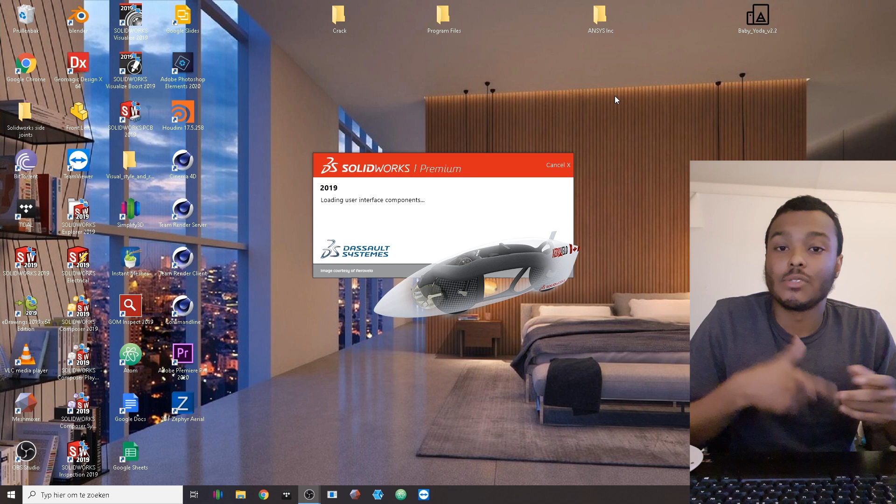Right now my SolidWorks is loading up, but I can talk you guys through a couple of renders I already made of the lower wishbone. In these renders you'll see the wishbone coming through the wheel, so you can see the whole wishbone assembly from outside the car, which is usually obstructed by a brake disc and caliper or rim spokes. Right now the design is open so you can see everything from all angles, and you'll even see it when the car body panels are attached. That's something I'm very much looking forward to.

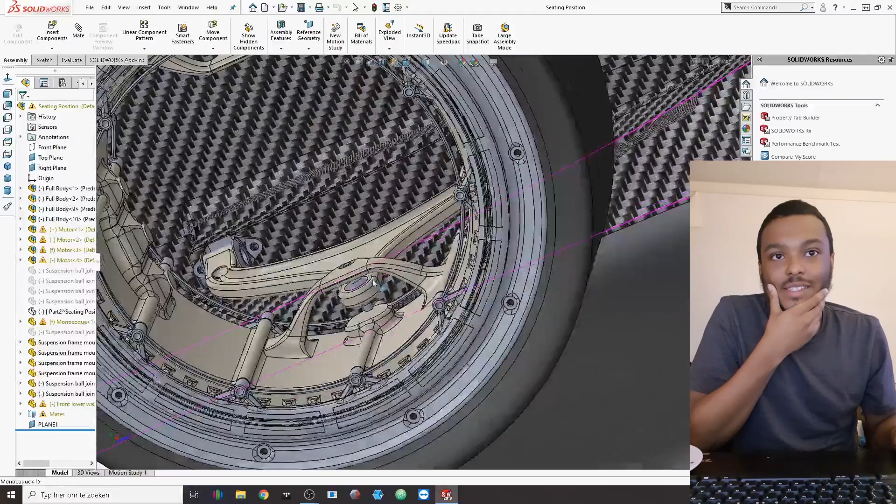Hopefully by this time my SolidWorks has loaded up, and a couple of you guys have subscribed, and I'll be able to take you through the process of making another wishbone. It's taking a while. Right now you can see I made a carbon fiber monocoque for the car, but I haven't put that in video form yet since I didn't have time. I'll make another video explaining how I did it and the thinking behind it, so don't worry about it. For now I'll show you the lower wishbone and how I made and designed it, and the principle behind it, then continue on to the top half.

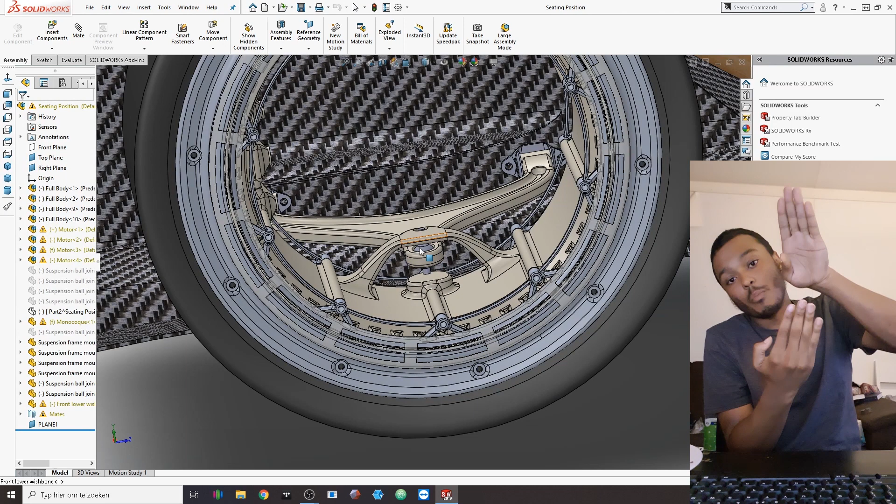For the lower wishbone, I made an encasing, like a bridge setup, to house the ball joint that will be attached to the wishbone. With this ball joint you have the ability not only to have suspension going up or down, but also let the wheel rotate, which you need for steering. If it were a regular joint, it would only go up and down with no steering capability. That's why we use ball joints here.

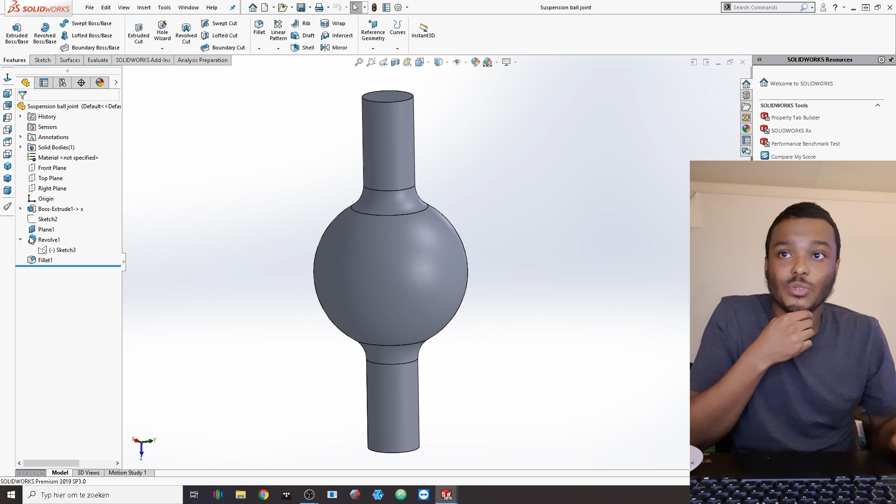If I go to this part separately, you can see how it's made - it's very simple, basically just this feature tree, and I could have made it in just 2 steps or even one, because I made a fillet that could have been done in the sketch. What I did is make one rod, then attached a sketch to the center of it with a circle. Then I made a revolve around the center line of the rod, which is how I got the shape. Then I added a fillet, but I could have done that in the revolve if I made the sketch with that profile. There are multiple ways of doing things - no necessarily right or wrong way - but that's basically how you end up with a ball joint.

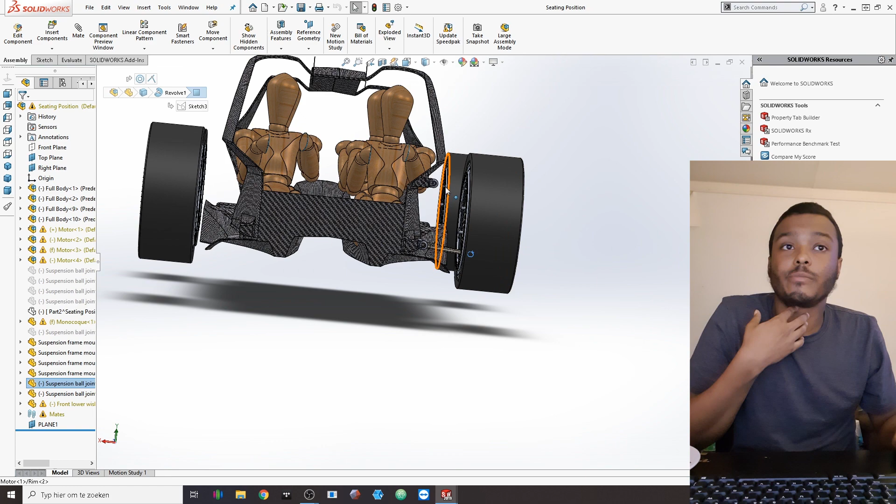What I also always do with suspension is, because the geometry won't be perfect, make sure it's level right here. If you want to attach the wheels in a certain way to the body, sometimes you have to maneuver them a little to get the angle right, while still maintaining the full range so you can do everything with it.

That is kind of why it is a little bit difficult to do these, because the angles might get messed up, and that's why I'm also going to show you how to get through that.

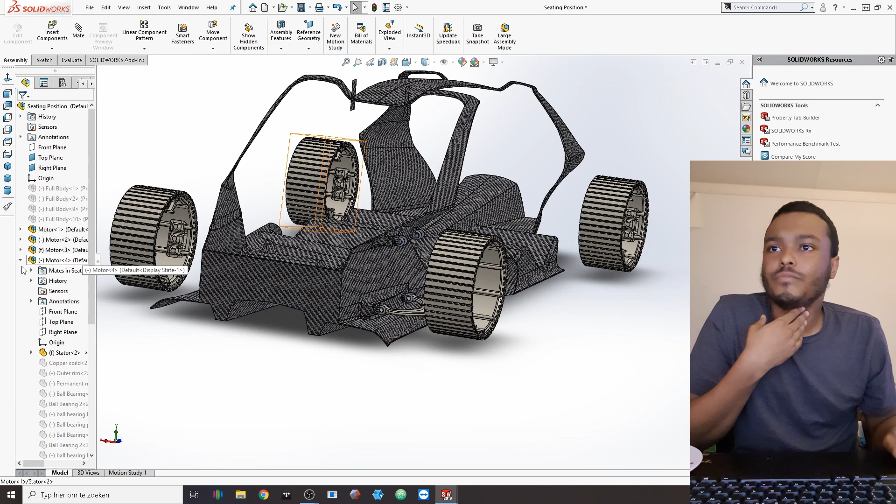Here you can already see I have a top ball joint in place. To make it a little easier on myself, I'm going to take out everything I don't need to get the file size down in this model, because the only thing I need is the rim you can see here. I'm also going to take the dummies out so you get all the RAM capable of doing it, because my computer isn't that fast these days. Let me also take out the other motors I don't really need.

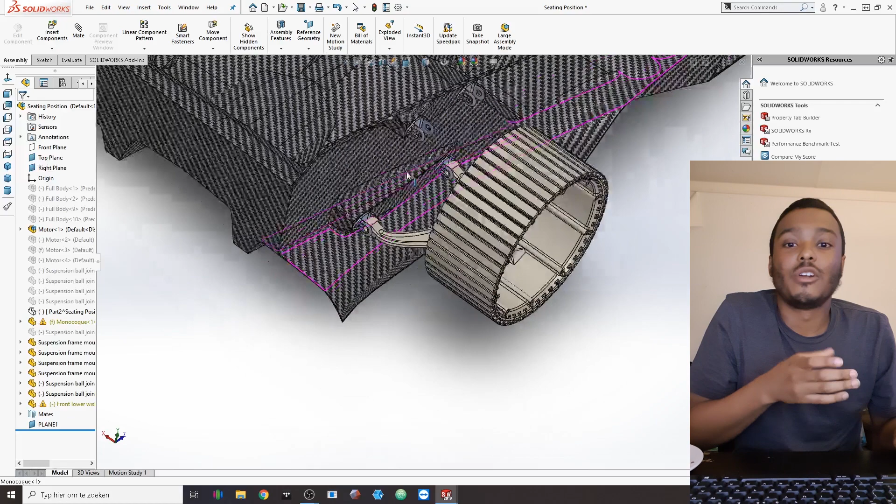So here we have the smallest file size, and it's also beneficial for you to do that if you're working on a smaller section of the car and don't need all the files in there—kick them out, because the more RAM you're using in SolidWorks, the easier it will crash too. That's also a tip that I have.

To begin with how to actually make it, I'm going to go back to the revolve, and once I have these in place, I'm going to show the sketch, because then I also have the center point of where the actual ball joint is sitting, and that's a very important point to have. You'll also have to do that here to get the center point of where the axis of rotation will be for that actual mounting point.

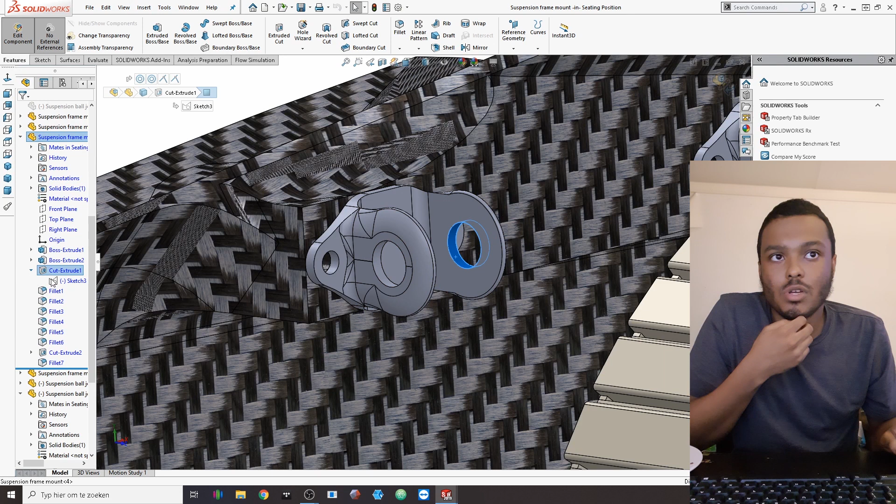So again, let's find out which sketch that is, and then I can showcase that one. And then we will also have a center of rotation for that point right there.

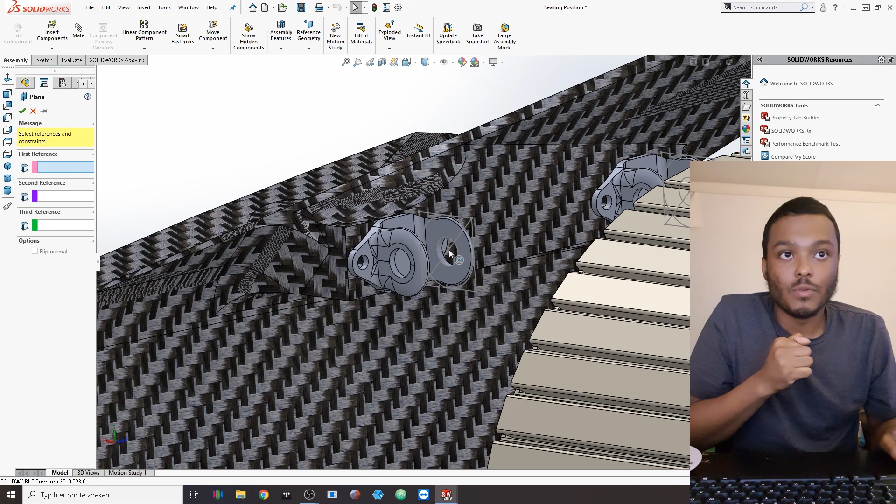The next step I always do is exit that component, and then within the actual model I make a new plane. So that is here, in assembly, reference geometry, plane, and then I select the actual center point right here of the axis of rotation for the suspension arm, and then do the same for that sketch right there.

So then you have the two planes selected, but you still need a ground plane, and you can select the front plane in my case, which is the same as this plane, so that doesn't really matter. Actually it's better to use the front plane instead of this sketch, because then it's not related to as many components—otherwise it's going to depend on that geometry existing for that plane to exist. That's a little messed up, but it's already the case with these two components, so we're just going to keep that to a minimum for now.

So that is the front plane, and then you have the same effect.

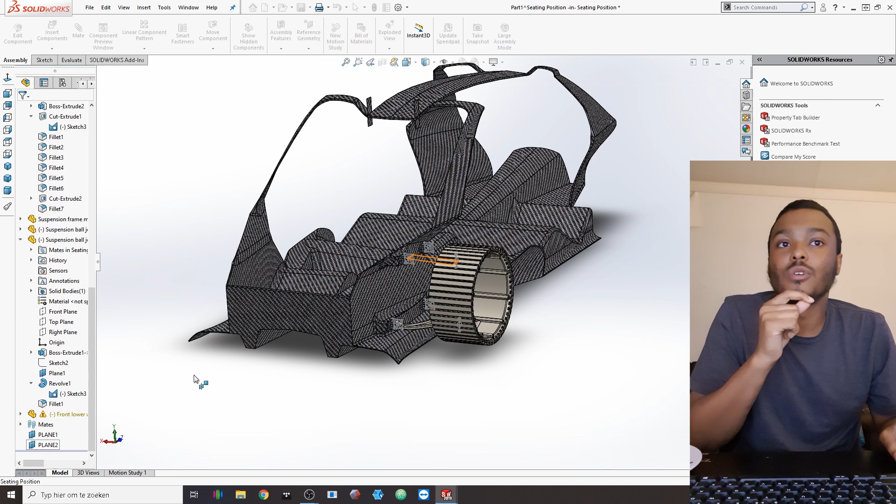Now that we have that plane, we can go to insert components, select the new part, and we'll base that new part on that plane, because then that will be the straight origin and everything for it. You can see on your cursor there's a green check, meaning select the surface you want your new part to be based on, and then you click on the plane. So it will use that plane as the first reference to lay the ground layer for.

And once that's done, now comes the part where we start to actually model the wishbone. So that isn't too difficult.

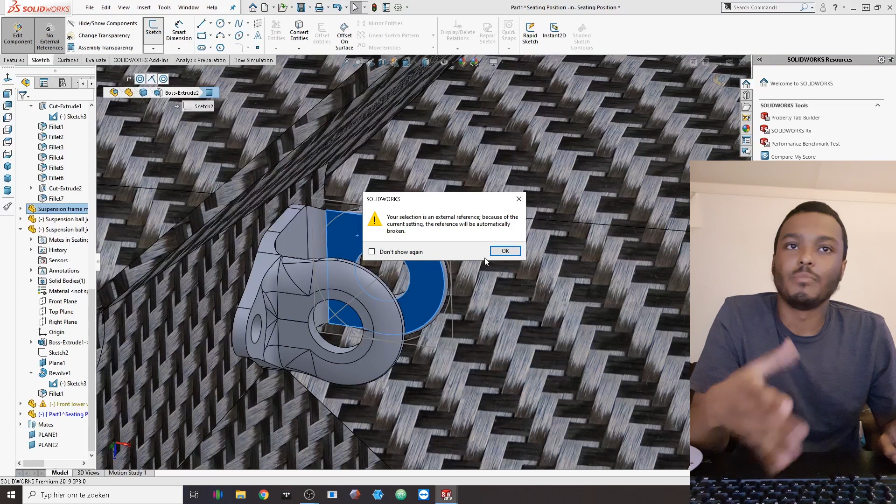I always exit the sketch again, select this plane, and because it's an external part that's already part of something else, you'll get a lot of errors and stuff like that, but you can ignore all of those.

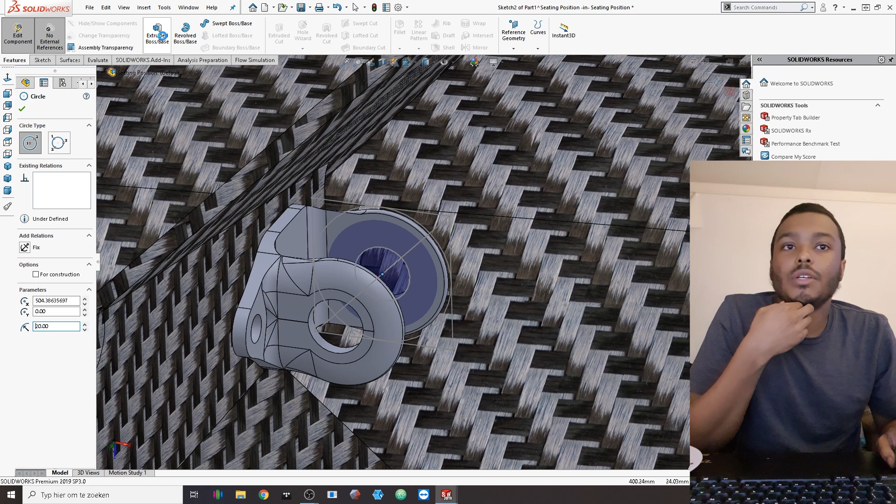Select the inner circle, click on convert entities—I think I used a 20 millimeter outline or outer radius for that circle—and then again I think it was 40 millimeters. Then you have the first circle to have an attachment point for your actual wishbone.

Do the same thing on the other end where the suspension frame mount is. I didn't show you how to make these, but it's very rudimentary and simple. You don't even have to make it as a separate component if you have a chassis that already has a hole in it.

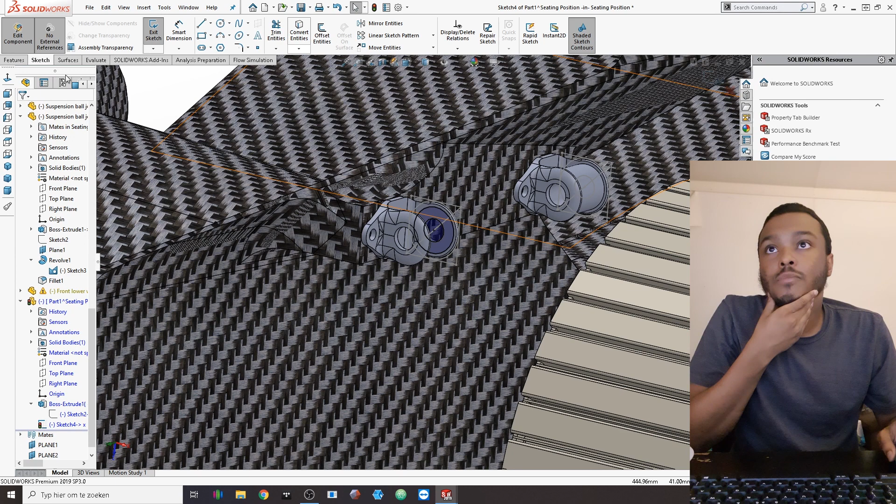Once you've selected this second face, go back to that new part we just made, and copy the sketch used on the previous lobe. Click on that sketch and click convert entities, and it will appear right there, same thing all over again. Then do a boss extrude for 40 millimeters.

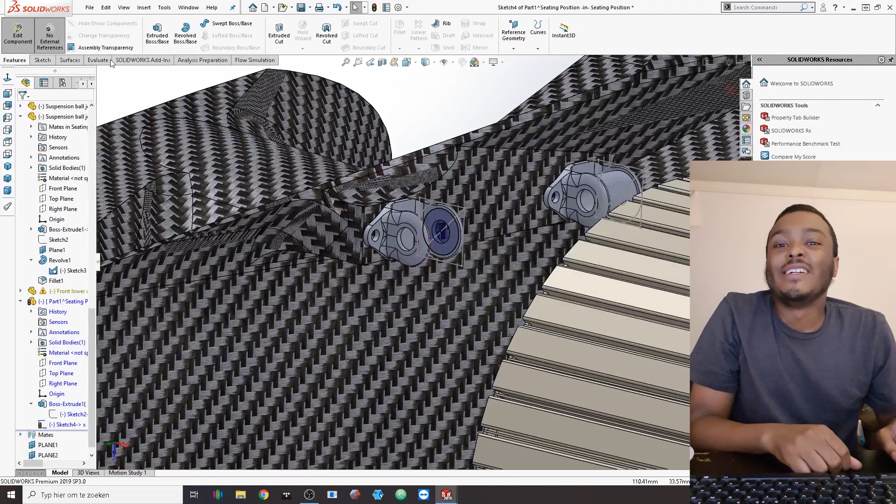I'm kind of talking through it because my SolidWorks is constantly lagging. I really need to upgrade my computer, this is getting very annoying, every single time it lags once I push a button. I'm going through great lengths to make this video, because if I'm not screen recording it's not this bad.

But at least now we have the second lobe, and we need to make one third one, for the ball joint. Once we've done that, it's easy sailing, because you can exit this assembly, and it's a little easier to modify things from outside it.

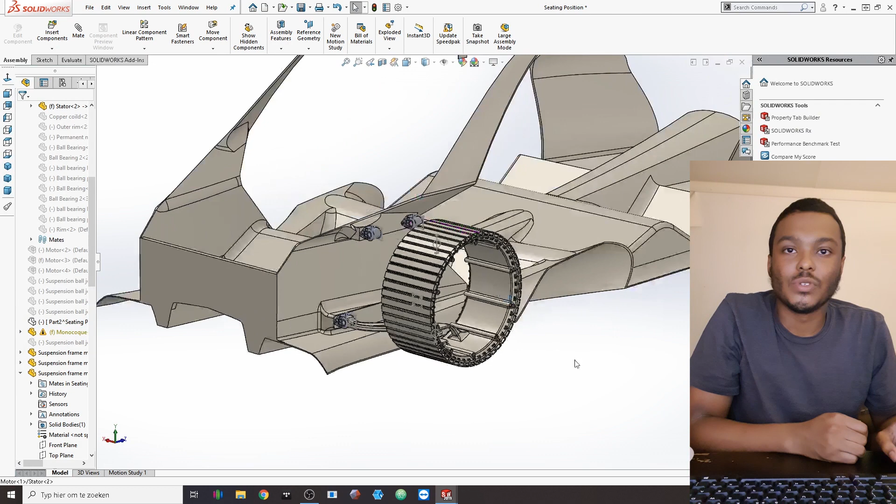Also, I'm going to modify the carbon fiber to be a regular texture, because seeing that graphic pattern constantly will probably slow the computer up a little. So I'll keep it like this for modeling purposes instead of showing the graphics with the carbon fiber. That's a tip to keep it smooth and keep your file sizes down.

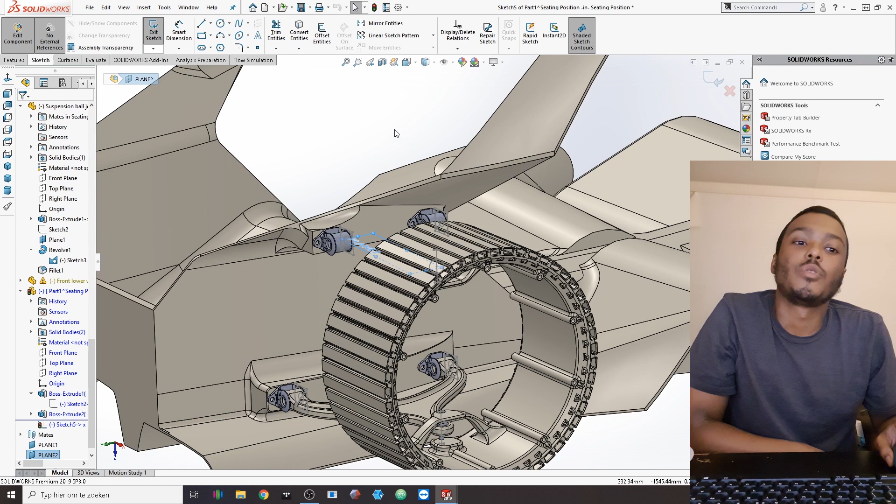I'll select that plane 2 that I made, and before that I need to be in the new part. So select plane 2, click on sketch, and go to the ball joint if my computer allows me, and I'll find that line sitting exactly on that sketch plane.

Click convert entities and select offset entities, 10 millimeters. The inner one was 15 millimeter radius, right? Yes, so I'll extrude it for 30, and instead of blind, select the mid plane, so it uses that as the middle reference point and goes in both directions. Now we have the point where the ball joint will sit, and where it's mounted to the actual monocoque of the car.

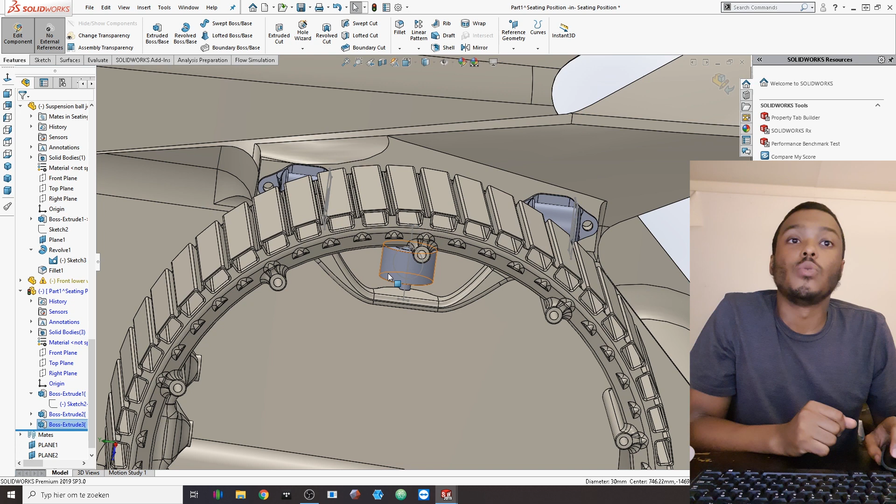So what I can do now is go to the part itself, and I'm going to save it real quick.

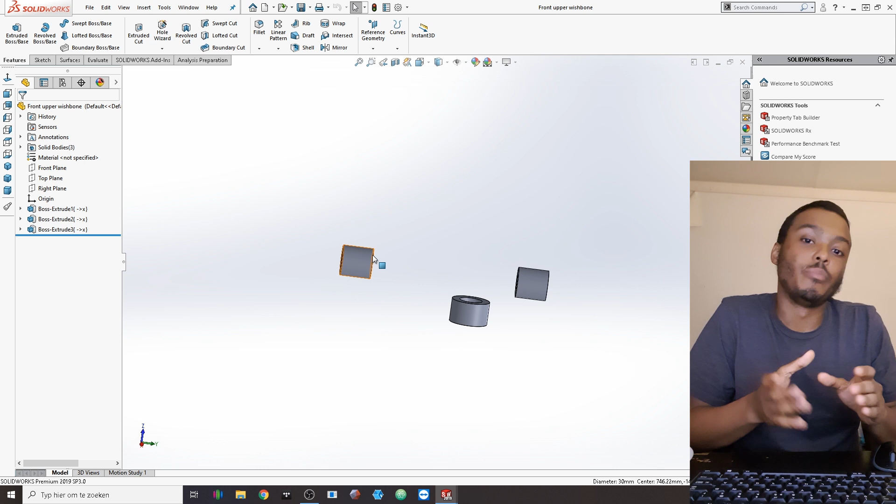Now that we have what I call the front upper wishbone, I'm designing it so it can be flipped to the other side, to not have separate components for front left and front right, just a front component you can multiply. In production it saves time and money, because you can order 10 of something for 5 cars instead of 10 for 10 cars, since you'd need separate sets. If you can use the same component on the left side as the right side, it's always beneficial, so that's why I did that.

I also heard in a previous video that I shouldn't really stomp on the table like that.

But now you can see why I made the decision to make the new part on the plane, because if I go to the front plane, it's actually completely centered, perfectly within these lines and on the basis of everything, not at an angle anywhere. It's just straight all the way, it's perfect.

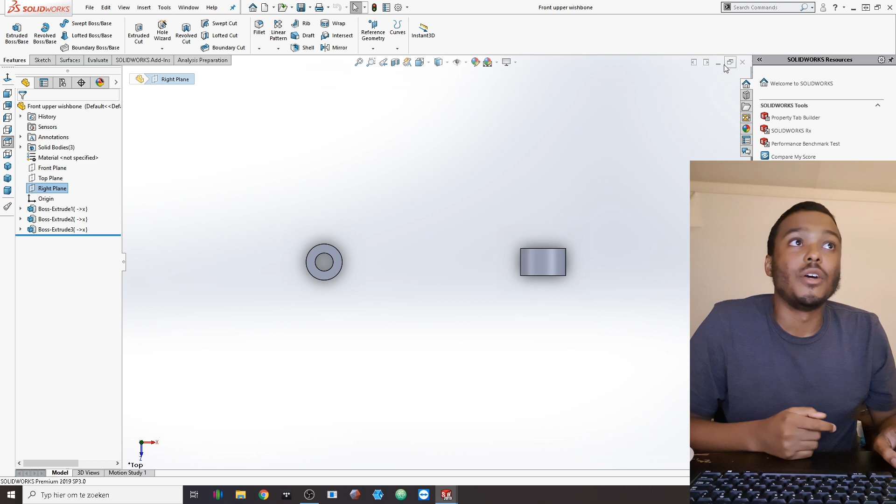Because otherwise, if I wouldn't do that, you would see that it would actually sit at this angle, and that would make it awkward to mirror it along to the next side and everything. So that is kind of why I did that. Hopefully that is understandable.

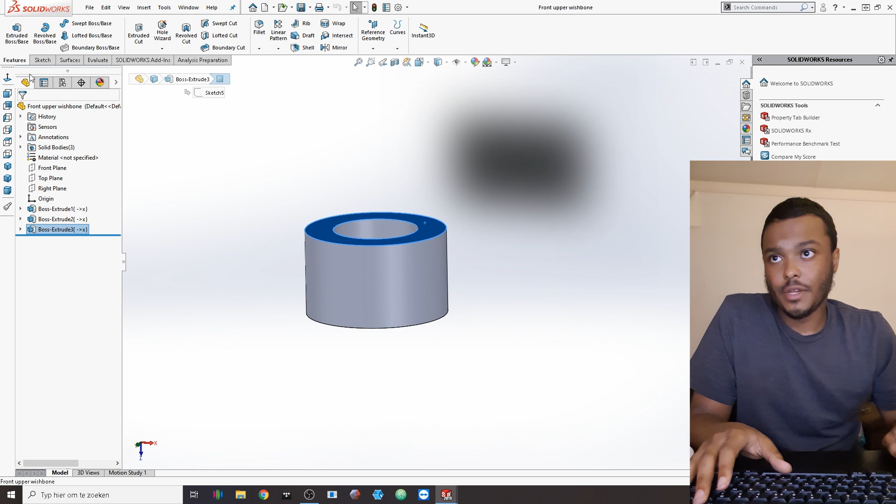Now that we're actually in the front upper wishbone, I'm also going to make a top and bottom section for it. So right here I can select the boss extrude and select convert entities, and add like 10 millimeters. It doesn't really matter because I'm gonna cut it off anyway. So add like 10 millimeters to the top and bottom section for it, and do that on both sides.

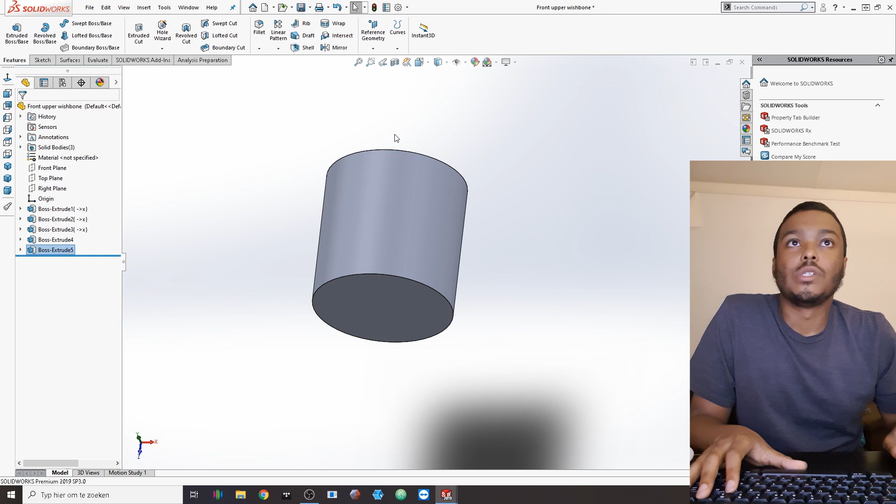And then I'm gonna use the section view, so I'm gonna take it from a side angle, right down the middle of that thing right there. And then I'm gonna select the fillet tool, and because this is now a cylinder that has exactly a 15 millimeter radius and is 30 millimeters high, I can just select 15 and it is a perfect ball right there. So that is already like the attachment for the ball joint and everything.

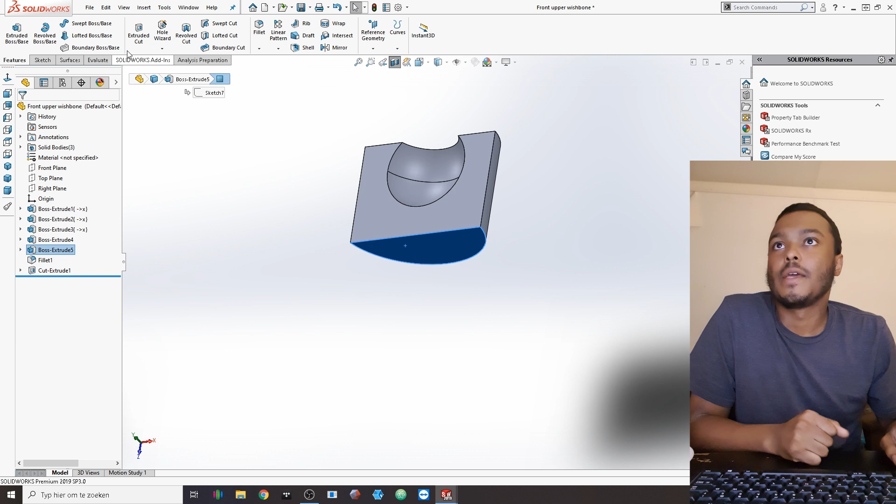So what we're gonna do now is again go to the top surface and do a cut extrude, convert entities, and select 15. And then do the same thing from the bottom, 15.

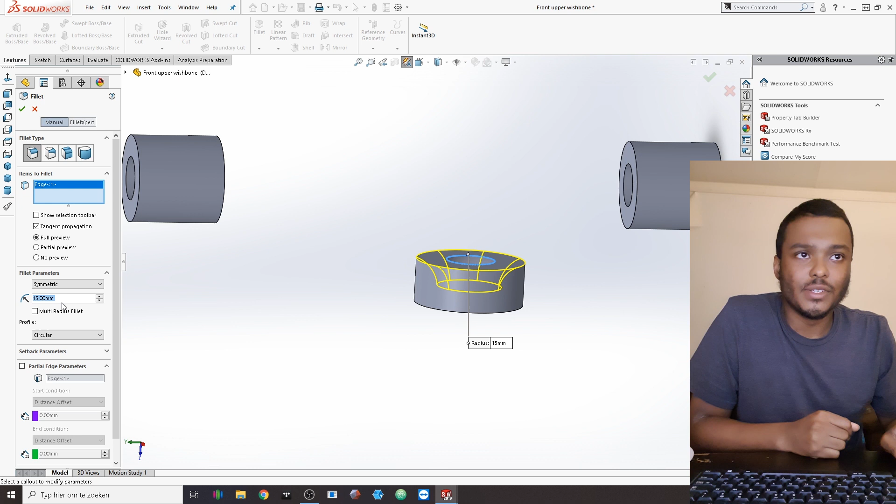And then I'm gonna select again the plane, this plane, because from here on I can then just do the mid plane again. So that's very similar to the initial process. Again, I'm gonna select the straight top view, and then I can draw little squares here.

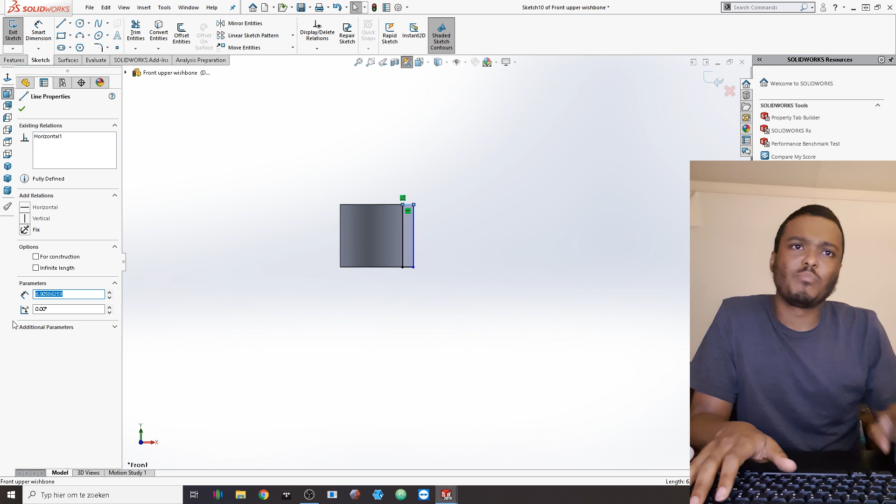That are the exact same width as the ball joints themselves. So I can just select that and drag it out a little bit, but I don't really want the distance to be too big, so let's put it at like 5 millimeters of an edge, and then I'm gonna just copy this section to here.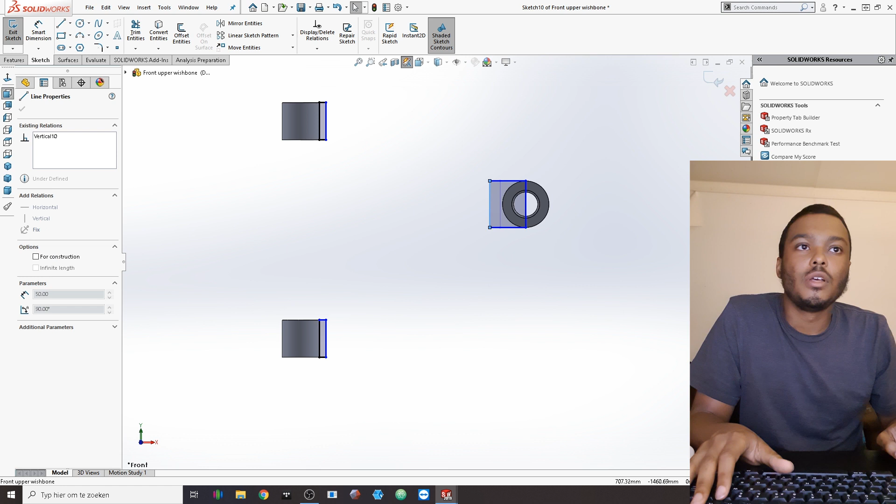And then I'm gonna do the same for the actual ball joint section of the wishbone, so again have it perfectly closed off. This length is supposed to be 50, and if that is 50, then I'm gonna put this at 25 to close that off perfectly.

And then what I'm gonna do is add some splines. So from here to here we'll have one spline, another one from here to here, and then there will be one at the bottom.

So I'm gonna make that, the one at the bottom is interesting because for this upper wishbone, the way that I'm gonna make the suspension is with an electric motor that is attached to this wishbone with a push rod, or a pull rod I should say, the electric motor will then control the ride height of the car, and also its rolling and bump adjustments and all of that. That's a technology that Audi came up with.

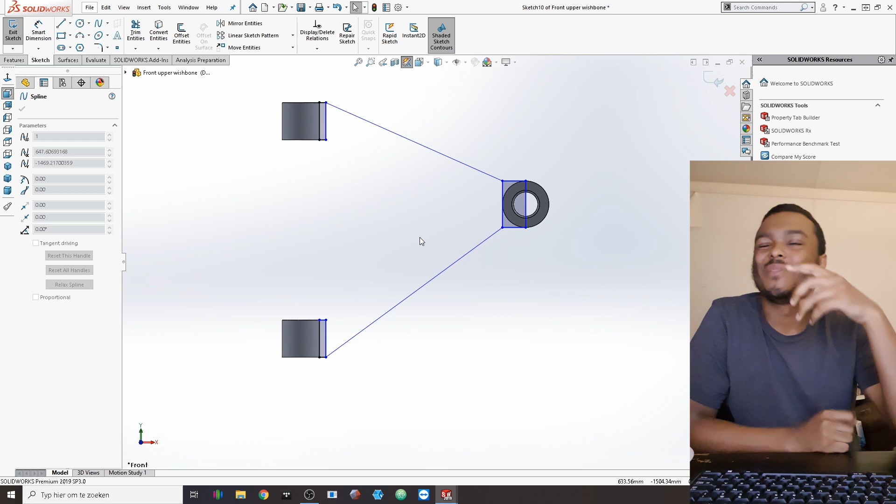So I would need to make a point in this wishbone for that pull rod to be connected to. I need to figure out what and how I'm gonna do that, but it's not too difficult, I can do that once I make the standard shape of the wishbone. But you just need to be a little bit preemptive with your thinking before you make something, because it can save you a lot of time if you have a vision already instead of just going off your gut, which I do too often.

But I'll show you guys what I'm talking about with the motor and everything once this is finalized. So with this point right here, once you selected it, you will get the line properties and everything for the spline right there. But if you then hold down your control button and also select this line, damn.

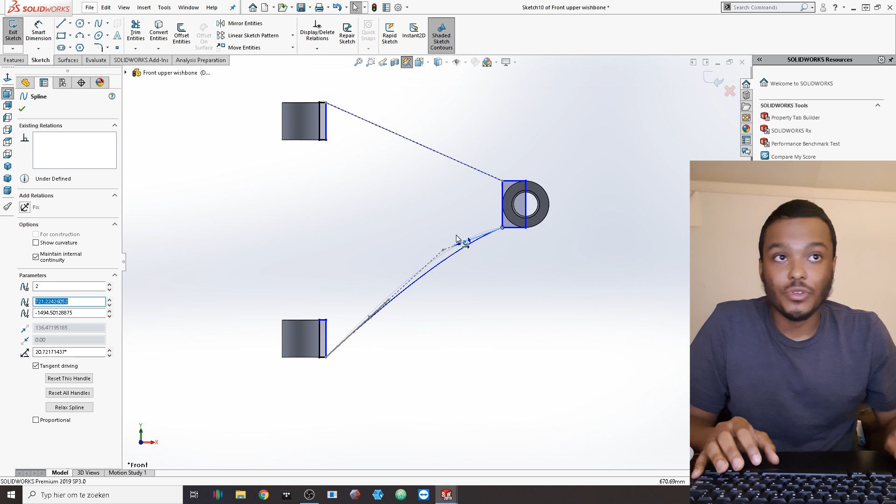With the spline tools, you can click on this point for the control polygon, then hold control and select this line, and select collinear or something like that. It will follow that guideline and make this point match perfectly to that point. Do the same here - select the point, hold control, select that same option, and repeat the process.

This ensures that you have perfect lines that match each other perfectly without any gap between them. Normally you'd be able to do that with a fillet tool, but this saves you that extra step.

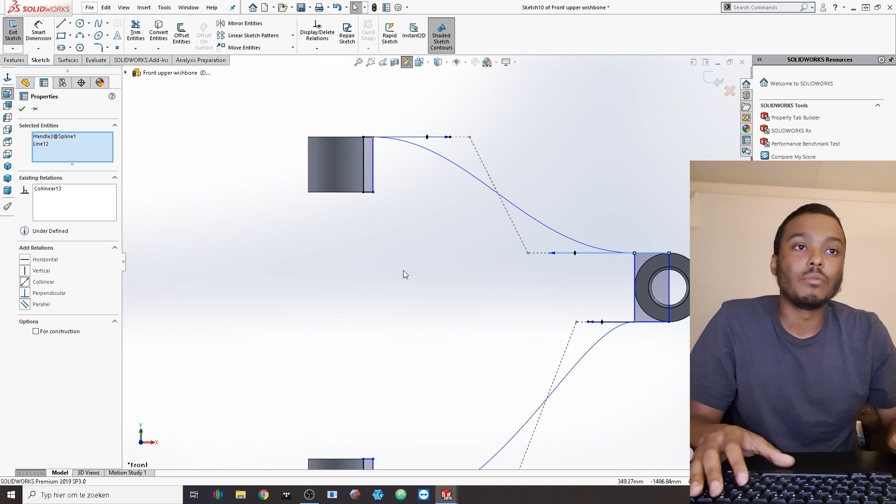If you want to adjust them, you can still pull on them and they will stay in that shape, and then you can adjust it however you want to.

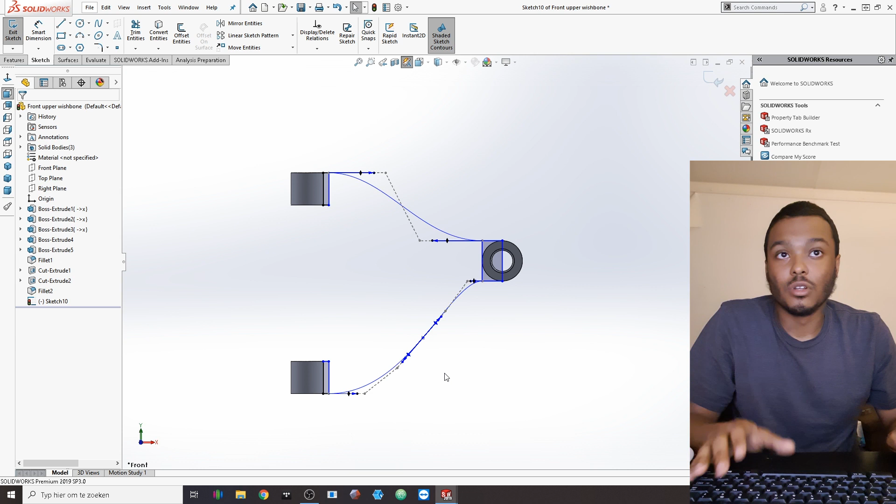What you could also do from this point, if you still don't like it, is right click it and add a tangency control to the middle of the spline, and then you can adjust it even further. It just depends on what you're looking for. For me, this is already fine, but I thought it might be helpful to some of you guys.

So again with this spline - I should describe what I'm doing more. I use the spline tool and dragged one point in the middle, somewhere in the center, and then attach it there.

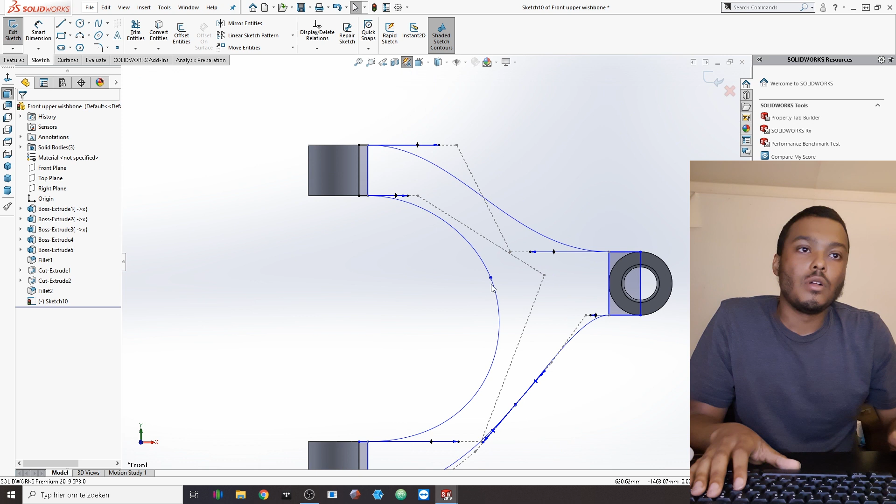Do the same thing once more to have this control polygon, and then select that same option again.

Is this a good point to figure out what I'm gonna do with that suspension mounting and everything?

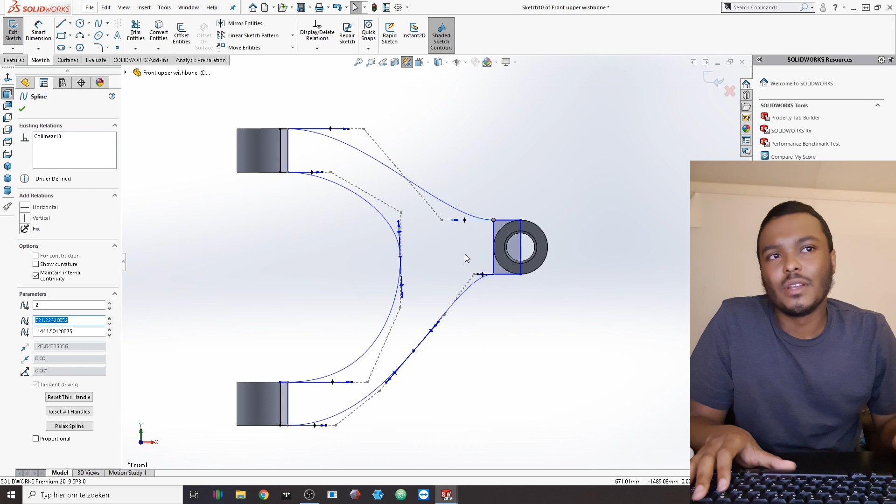I think I'm gonna do something directly in the center of that point, because it will be visible in the car, and there also isn't an output shaft from an electric motor on the internals of the car going towards the center, so the whole center section will be open for me to do whatever I want with it.

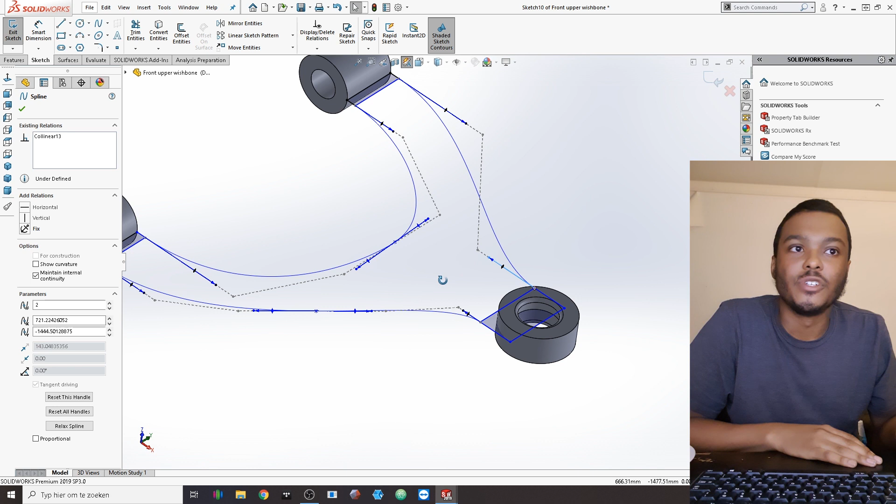So I think I'm just gonna use that section, but let me finish this and then I'll talk a little bit more about it.

The next step is to do an extrude. Select the mid plane, and I'm gonna put this at 20 millimeters, maybe even 25. But then this is no longer gonna match, so I'm gonna just put it at 20.

Then I can select this surface and do an extrude, but that is dumb. I'm gonna keep my mistakes in the edit so you guys can also see what my mistakes are.

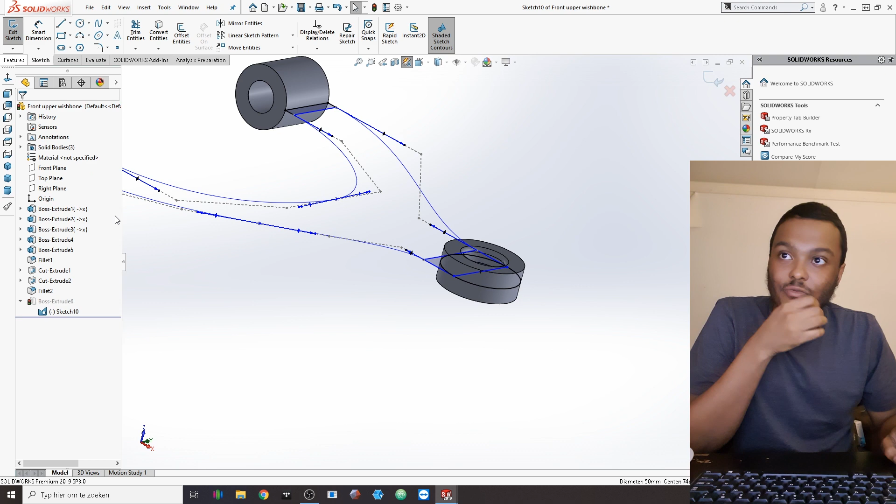I can already within the sketch select this outer circle, convert entities, and do it in one go. You want to keep the amount of features you use in a file as low as you can, because all of those add megabytes to the file size, use up extra RAM, and all that. Keeping everything as small as possible is beneficial to overall performance.

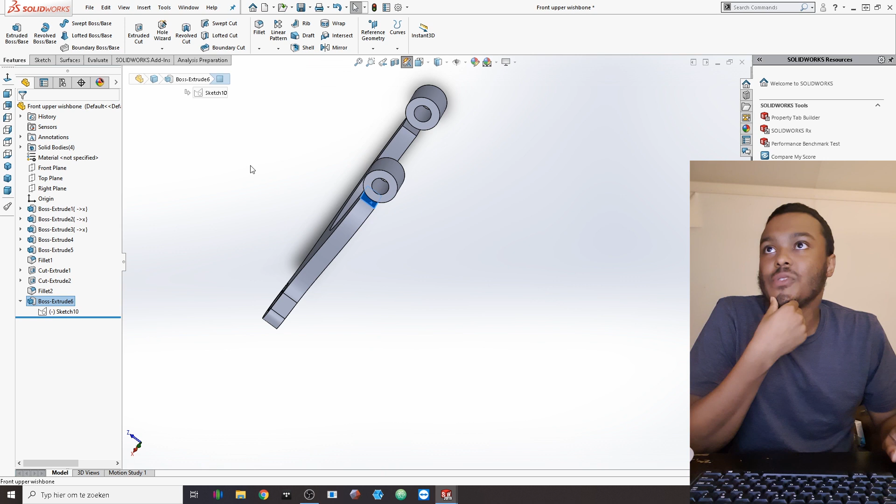These lobes still need to be attached. Select the surface, click convert entities, then do another extrude, and you can double click that surface - because the surface here is the same as there, you can attach it directly. Now we have our wishbone setup.

For the next part, let's see - this is not really attached properly. So those aren't merged together.

Here, merge results, and then select all bodies. And then now you can see it's one entire part. So then I can select...

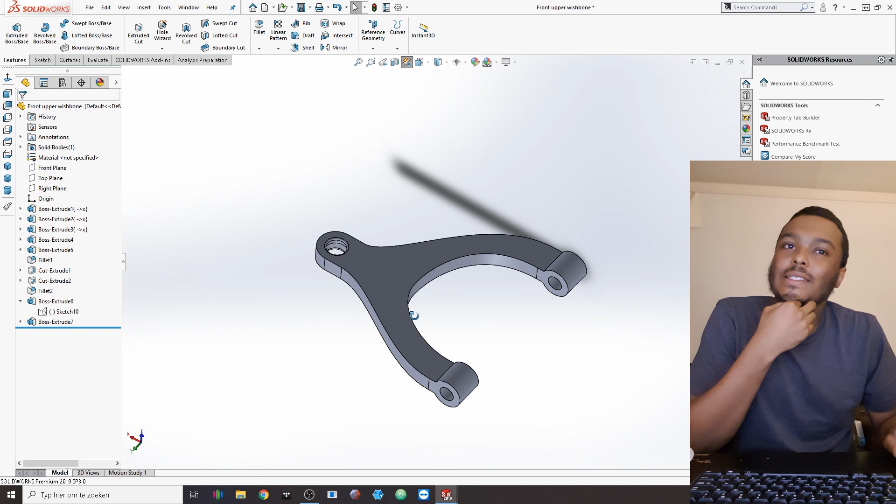Damn, I really want to make that attachment point right here. So I'm gonna use it. Does it need to be a ball joint in there, or is it even possible to do it with just a regular joint? I think it will be.

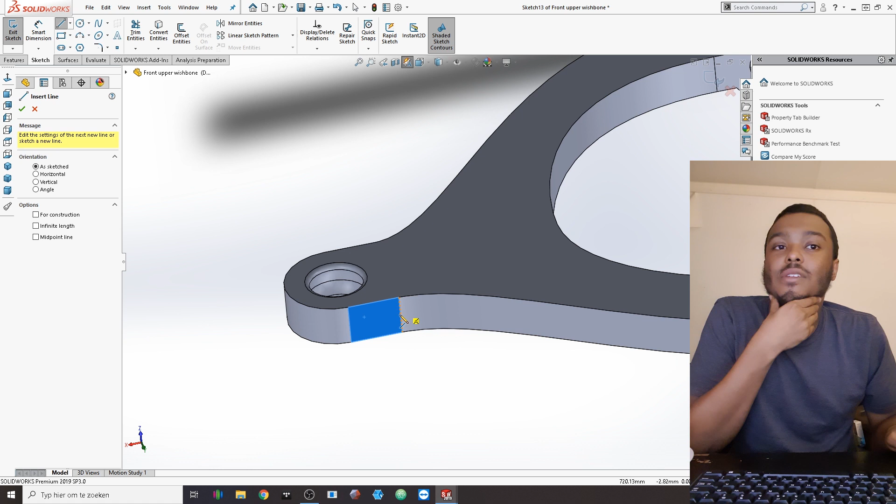So I'm gonna use a cut extrude, and from the center of this line right here, I'm gonna do it a little bit more towards the right. So let's say that is like a 10 millimeter offset.

And then from that point, I'm gonna use, damn, how large should it be? I think the hole itself will be good if it is like 5 millimeters or something in its radius. And then yeah, I'm gonna just start off with 5. So I'm gonna cut this all the way, but in both directions, so through both directions.

And I'm gonna then again select the surface, again do a cut extrude, and again select the circle, click on convert entities, offset entities, because now I want to make a bigger circle out of it. And instead of doing, let's do 5, but then it's sitting perfectly on those edges, so that would create another 0 thickness geometry and everything.

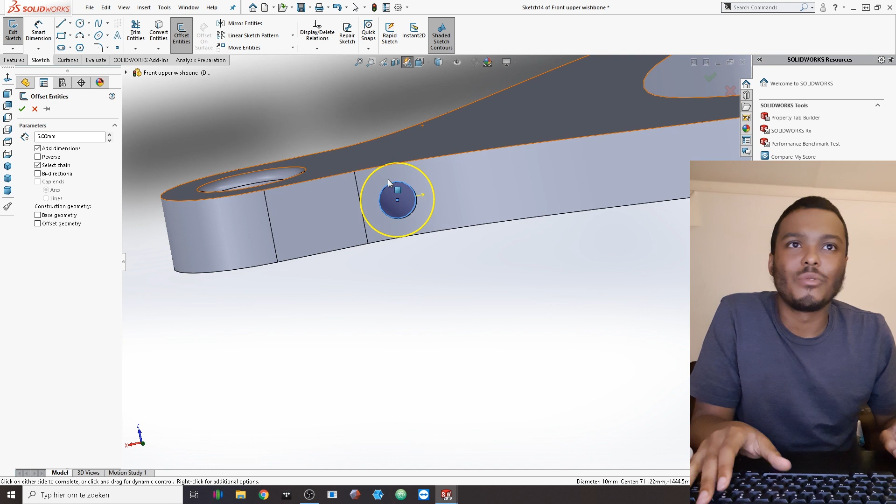Okay, so I'm gonna not do that sketch right now, but we'll save it though. So we already have that hole in there, and now I'm gonna make a bigger hole.

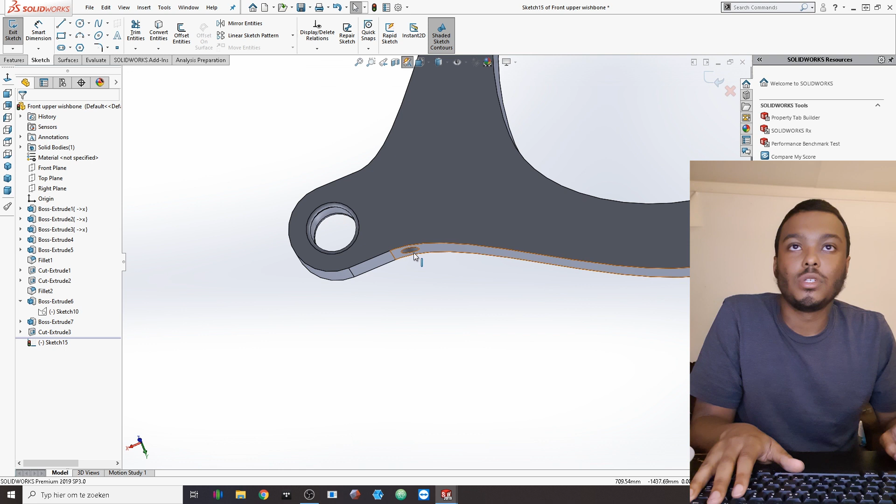So I selected the top surface, clicked on sketch, and then I can probably do convert entities right here, or I can't.

Okay, so now that I have the hole here in place, like this, the axis of rotation will be for the ball joint. And two, one thing that I should also mention is that I move this rotation point as far forward as possible, because the moment arm of the actual pushrod being attached to that wishbone is supposed to be as long as possible.

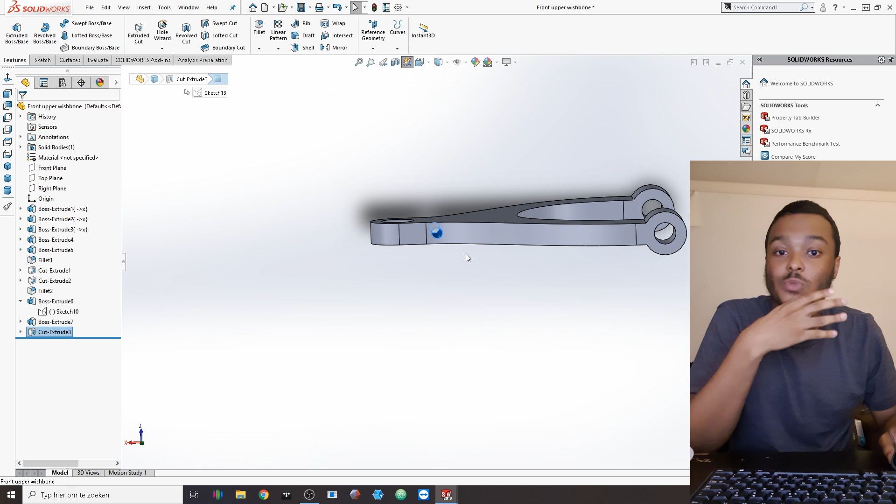The longer it is, the better control you will have over that motor and controlling that ride height and all the forces that will be put through it in the suspension and everything. So that is something that you should always do, is kind of maximize the length of these moment arms in the suspension and everything. So that is why I put it up to this position.

But now I need to make like a hole that is actually able to have a bolt go through it. So I'm gonna select the top surface and select cut extrude, and then from this point right here, I made like a 10 millimeter offset for a 5 millimeter circle radius.

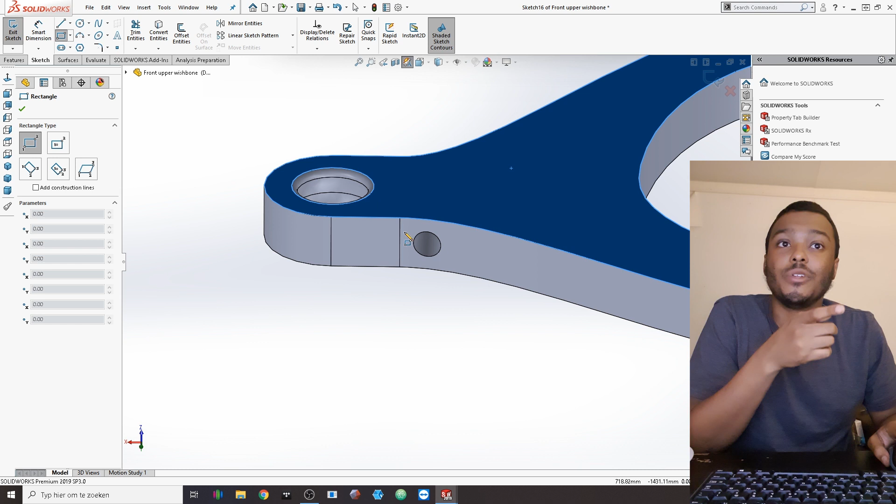So if I make a box here that is 10 millimeters off, then this will be the same center line of everything right here. So I can then do offset entities, don't select chain, bidirectional in both directions. And then I'm gonna make it 15 millimeters in both directions.

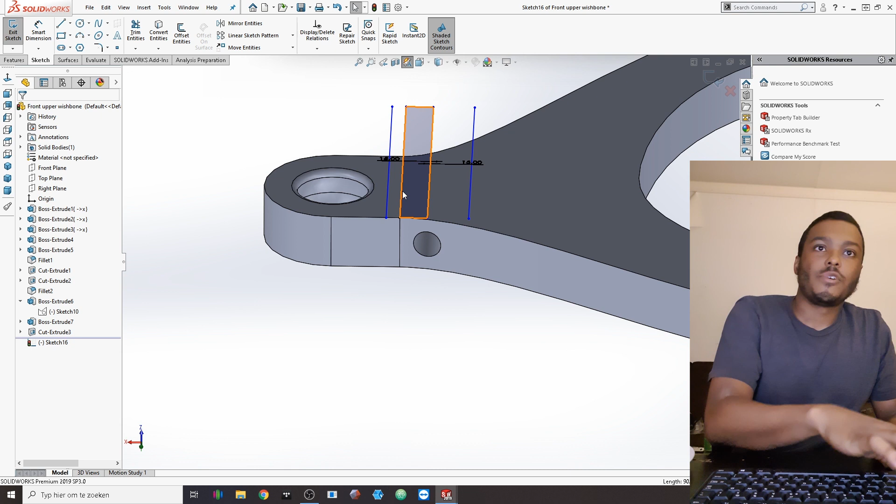So then I can delete this line right here, I won't need those. And then from the top view, or I should just do the normal view too, I can then drag from the center of this circle right here and draw another line, and also do like 15 millimeters.

So then I will have a 3 centimeter cube section right there that I can cut extrude. So I'm gonna trim all of these entities that I'm not gonna use out of that section right there.

And sometimes it's good to keep them in there just to have the relations that it can move, but you can also just fix these sketches if you're used to having undetermined or determined sketches, so you can make them fix, and then they will go black and won't ever adjust in their dimensions. That is also something you can do. I usually don't, but I should though.

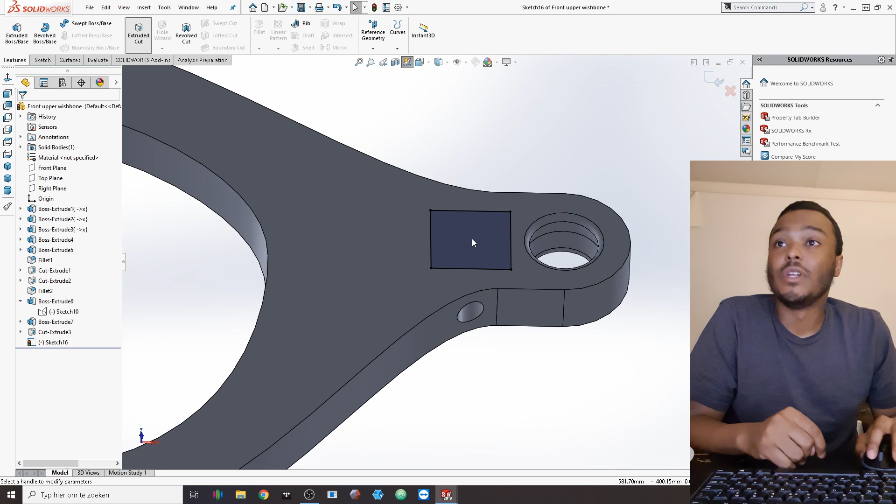But yeah, so again, you would have that, and then I'm gonna add a nice fillet to it. I don't know how big I can make it. I think it will be pretty nice if it is just perfectly rounded off.

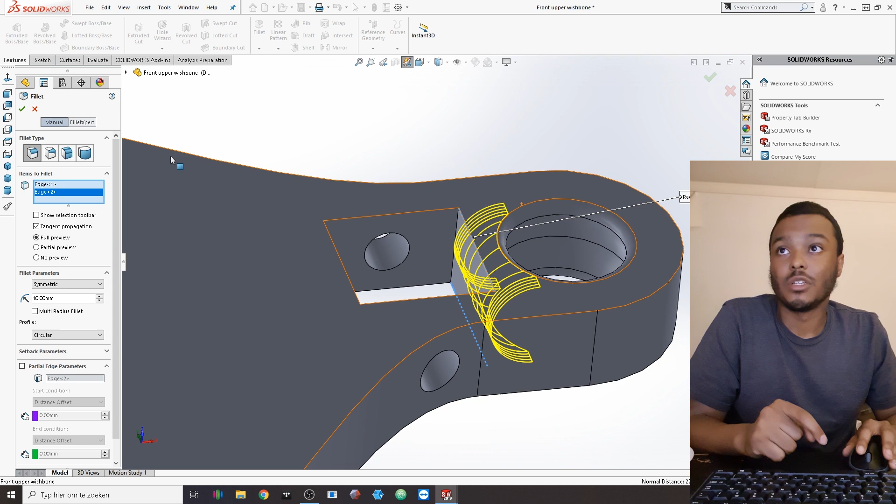So because it's like a 20 millimeter height, then you can put the fillet at 10, and then we'll make it a perfect circle right there. And yeah, it has a flat surface, but that's because this is in there. I'm gonna do the same on the other side.

I need to make something so there's actually a possibility for a bolt to be bolted through here. So I'm gonna select this surface, and for this radius I'm gonna make it 12.5. It'll extrude outward a little bit, but that will be fine.

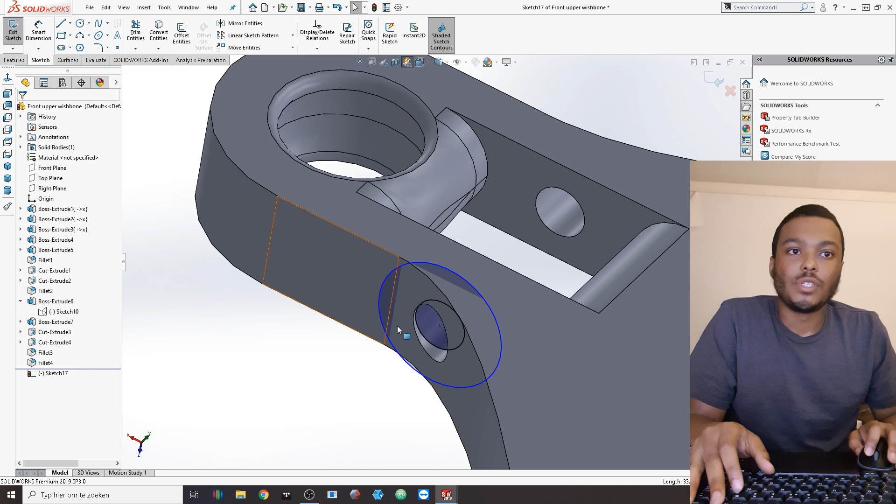From here, I'm gonna just extrude this, but it should also have the hole in it. So convert entities on that sketch to keep the hole there, and I'm gonna just extrude it up to this point.

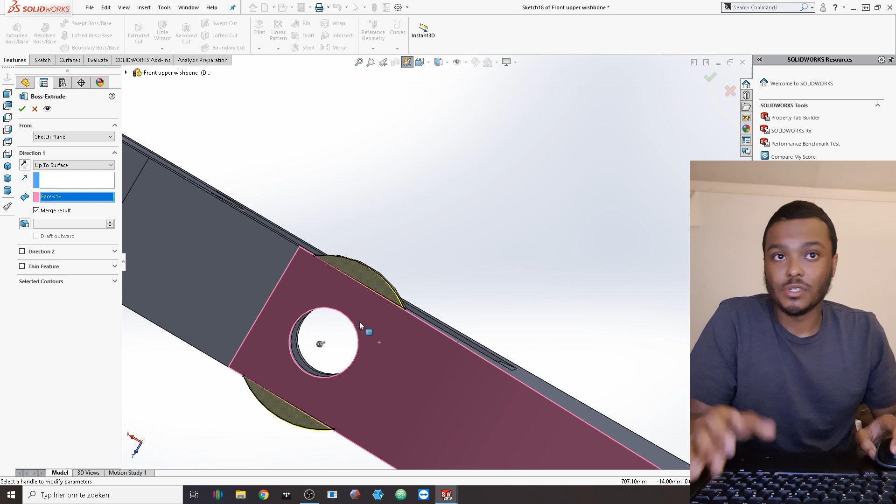Even though it's fully up to the edge, that's not too big of a problem. But if you want it, because it probably will look nicer, you can select all of those entities and do an extrude up to surface, select that surface, and you'll have a nice rounded off edge.

Repeat the process on the other side, but let me finish one more thing first. Select this surface again from the sketch, but now make it a 10 millimeter hole in radius, then use the offset and drag it inward, and reverse this, but it shouldn't be 10, it should be like 7.5, something like that.

Then you actually have a spacer for the bolt to sit in there, and I'm gonna repeat it on the other side right now.

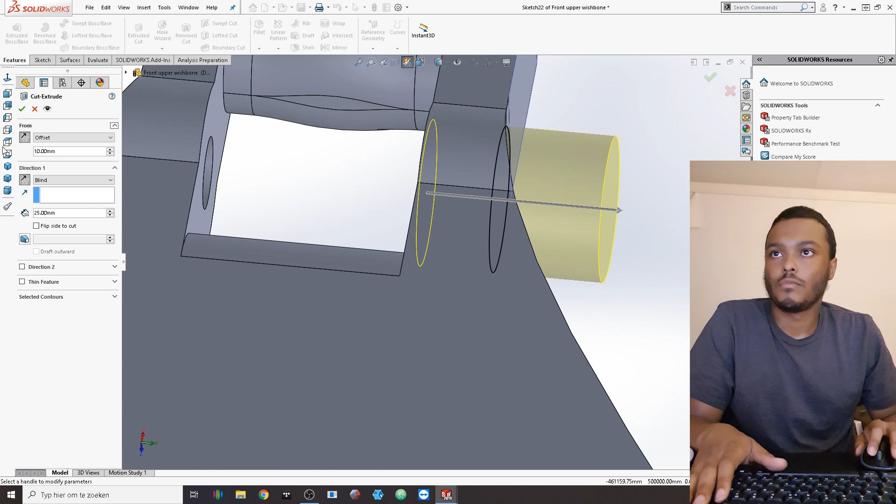So now we have the two sides where we also have the hole in here. So now we can put a bolt in here, attach a pivot point, and you'll be able to push that rotational bar in there.

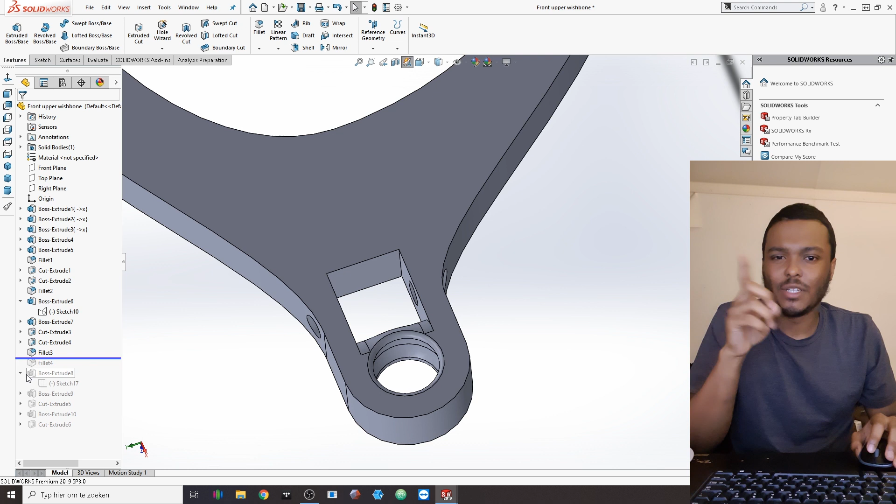But I think for the spacing, we need to push this point a little bit forward. So I'm gonna roll that feature tree up a bit, and do another cut extrude here to give it a little bit more space to bounce in there, because that rod will go in this direction, so we need a little bit more clearance.

That will be fine. That is probably even a little bit too extreme, but you know what, let's keep it like that.

I don't know if the fillet will automatically also change with it. No, it didn't. So then we need to adjust that fillet too, select these edges as the ones it's missing right now, and it will replace those.

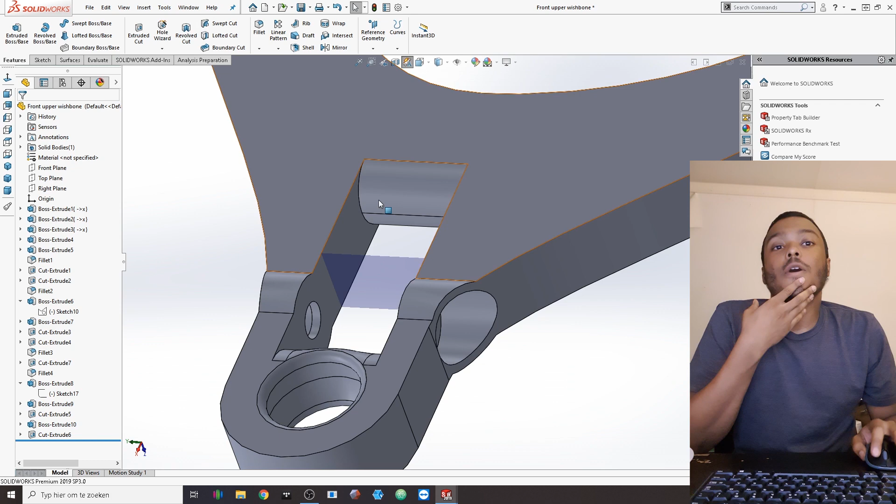So now here we have a little bit of a more sophisticated looking engineering type wishbone, I should say.

Now I'm gonna do everything to make it look nicer. I'm gonna add some fillets here - is that the right way of pronouncing that? Fillets? I don't know. And mirror that along to the other side.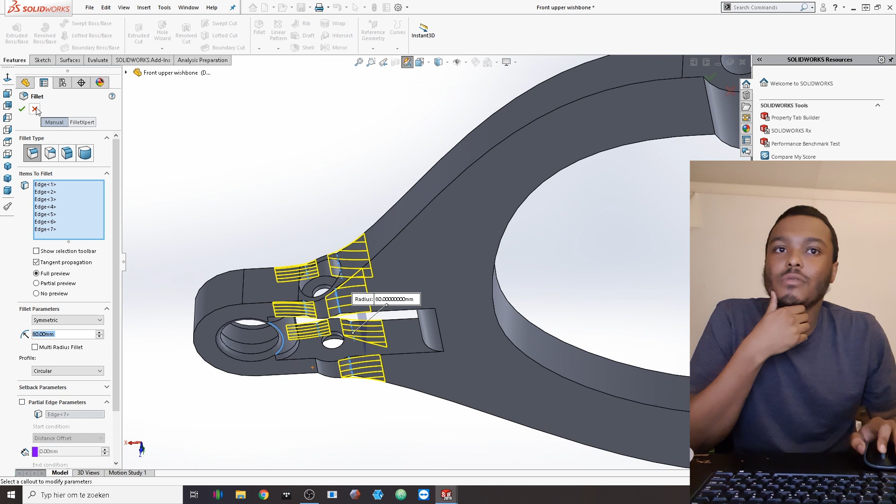Maybe I shouldn't do the fillets right now. Let's first do the extrude itself. So again, select the top surface, do cut extrude, offset entities, and then reverse them.

Let's put it at 5 millimeters, or maybe do 7.5. Then we come up with a surface like that, and we can cut extrude it. Because it's actually 20 millimeters thick, I'm gonna put it again at 7.5, so I can also do that on the bottom section to keep it all the same everywhere.

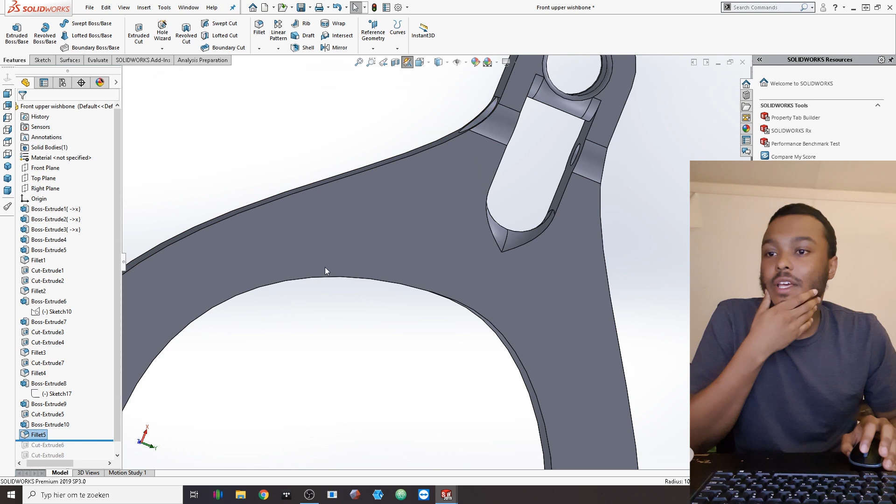Now that I think about it, before I do the cut extrude, let's add a fillet to this section here. Let's make that 15 millimeters to round everything off, then do the cut extrude. You can see it automatically also adjusts because you used the offset entities, so it will just go off of the face that's sitting right there.

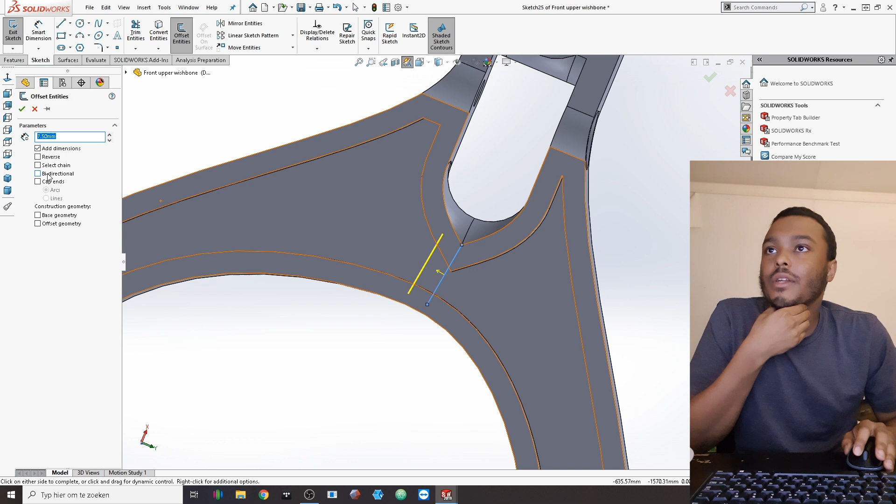To add a little bit of strength, I'm also gonna make a little bit of a rod here, like a rib I should say, and do that as a bidirectional offset entities. I don't know if 7.5 is a little bit too much, but at least we'll have something in there to add a little bit of strength to it. And then the other direction. Cool.

So the next step will be to add more fillets to the inner shapes to round things off a little bit nicer.

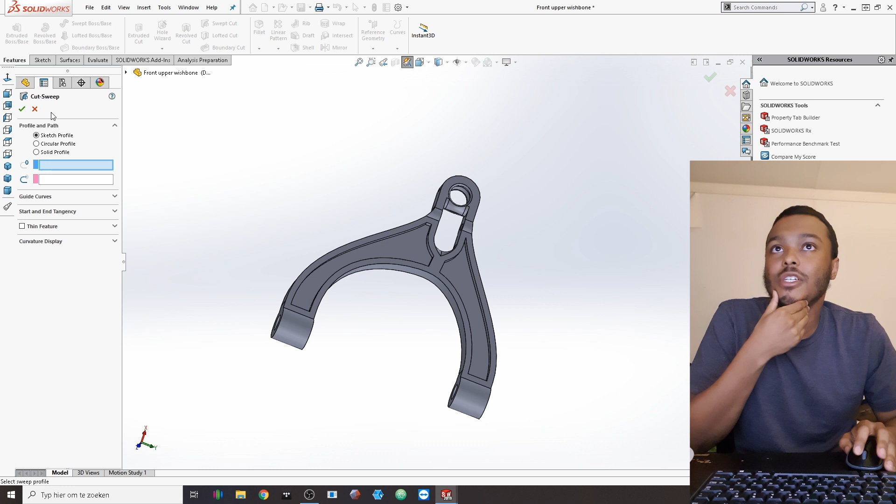I should put this at 10 millimeters, or let's just do 15. Now that we have the top surface of everything, before adding the fillets to the outer rings and outer surface, we go to the bottom, select the bottom surface, click on sketch, select convert entities, select both surfaces, and you'll see those on the bottom section. Cut extrude both of them.

Why? For some reason this doesn't seem to work. No clue why, but something is wrong, something weird is happening with the sketch, it kind of keeps it open for some reason.

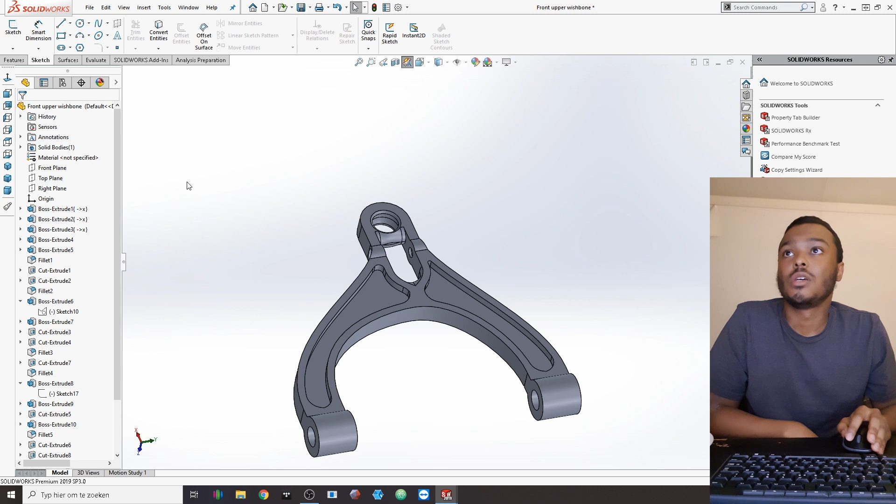What I can do, which isn't the best solution but is possible, is cut it in half straight through and then mirror it onto the next side. But before I do that, if I use that method, I'm going to finish this whole top section and then mirror it in one way instead of doing it all over again on the bottom section. So I'm going to use all these fillets and make everything as smooth as possible, because that will also help with the strength. It does also add a little bit of weight, because this is all material you're adding right here.

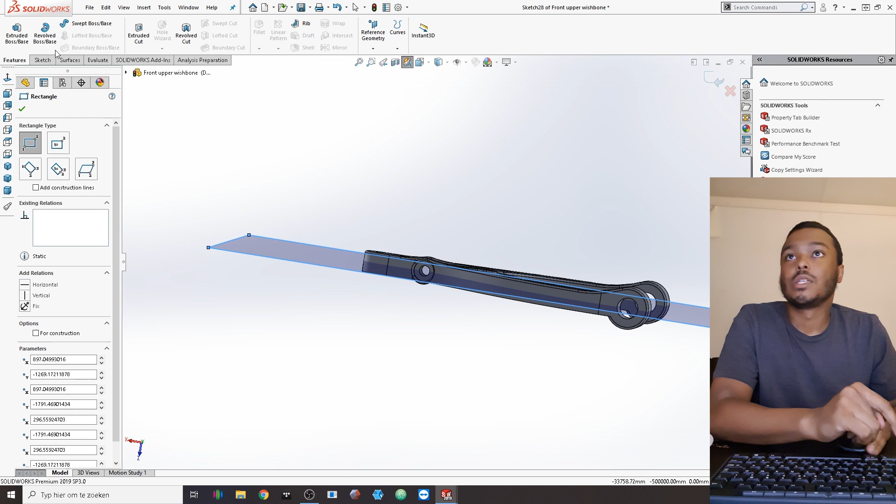I'm going to use the same here. Select which plane is it? The front plane right here. Select extrude cut, make one big rectangular shape that follows everything, and you'll see that it is perfectly down the middle. Then I cut extrude it downward, select the mirror tool, grab this surface and the bodies to mirror that whole thing, and boom, perfect. So there we go, that is the front upper wishbone.

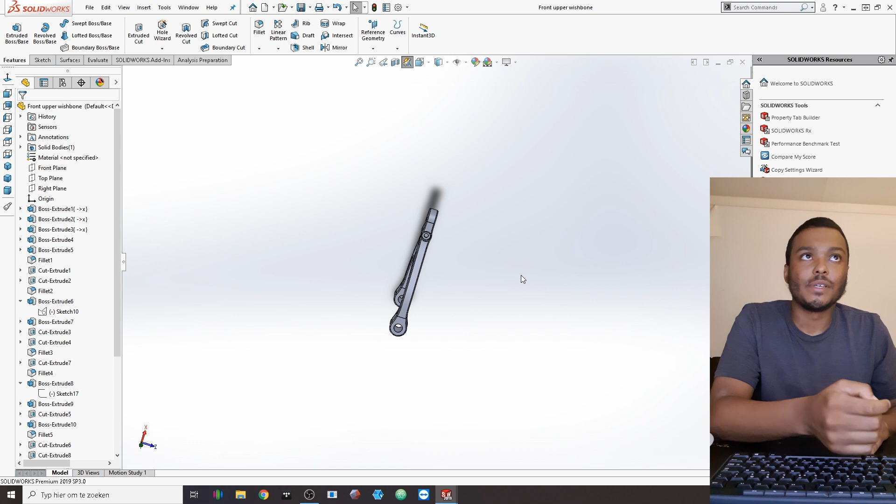If I now go back to the assembly, I'm going to close this off because I fear my assembly is going to cause everything to slow down a little bit. Now you can see we have the two wishbones, one on top, one on the bottom, and this wishbone will automatically be able to be put right here in this section. I still need to mirror this side, and I also have the suspension mounting points from the monocoque on the other side, and my SolidWorks again clogged up.

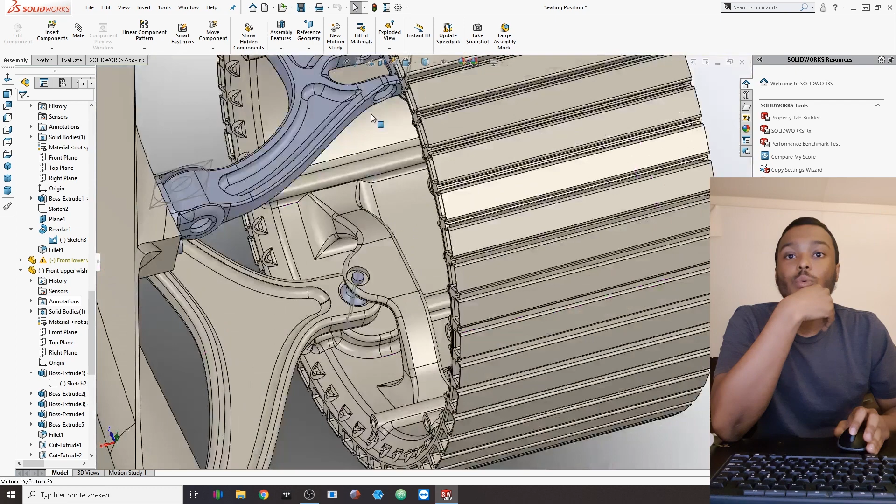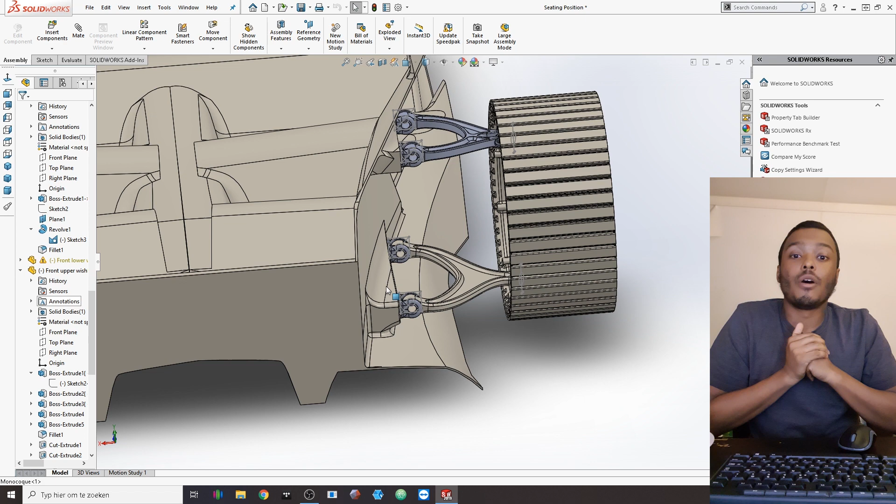The push rod will actually be attached right here to the wishbone, going downward into the actual electric motor that will control the ride height. That will allow the car to have no anti-roll bar, because all the rolling resistance and everything will be controlled via the electric motors. That will allow the car to not have any type of springs at all, because these are usually thick steel coils, very heavy components usually mounted higher up in the car. So it just has a lot of benefits, keeping the car very simple. It's based more on electronics than on mechanical components, but with reliability, the less parts you have, the less parts can go wrong.

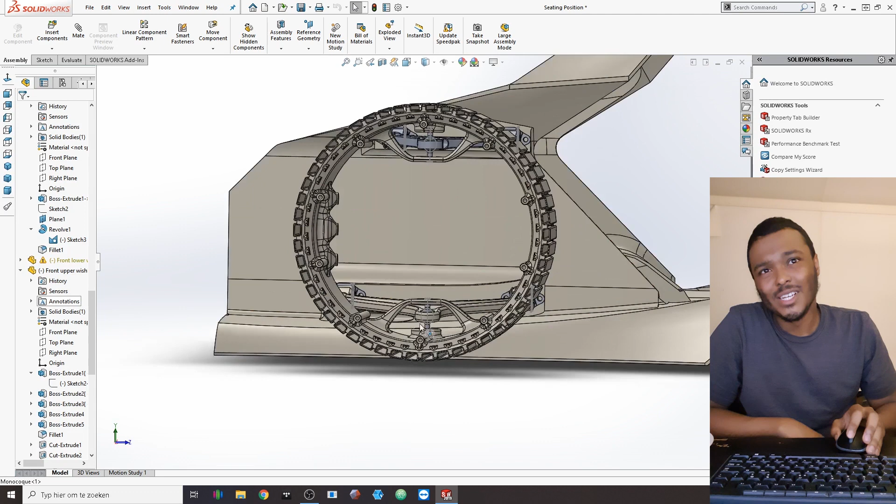That is kind of the whole thinking of this 2040 design project and where I want to take it. It's also looking amazing, that is my highlight personally. I'm again making renders like I did with the previous one so you can see the top and bottom section, and this is coming along very nicely. Can you imagine looking at the suspension wishbones from outside? We have never seen this before on a car. So I'm just satisfying myself doing groundbreaking stuff right here. I'm a little bit overexcited, my bad.